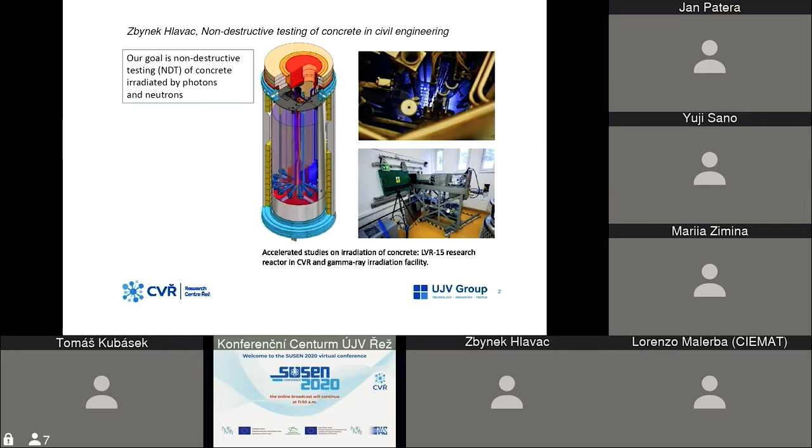What I would like to talk about in this presentation is especially non-destructive testing methods. Those methods have been developed mainly in the SUSEN project and also in our Research for SUSEN project.

We are targeted at mass change methods. Then we are trying to find the volume change — this is radiation-induced volumetric expansion. And also, what is my major focus, we are interested in mechanical properties change.

The mass change we can measure by very accurate scales. I think the accuracy is about 1/10 of a microgram, which is sufficient even for very small samples.

Volume change can be detected by various methods. We are using dimension measurement or density measurement. Density can be done by water or helium pycnometry.

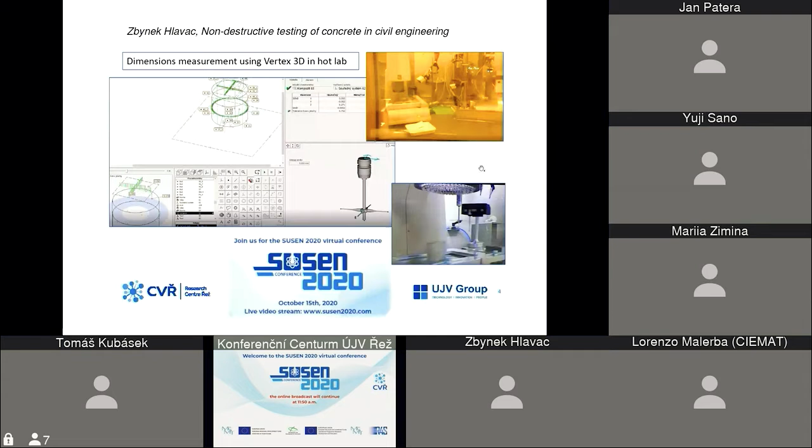Let's go on to other possibilities for how to determine volumetric expansion — pycnometry. We are using water or helium pycnometry.

Water pycnometry is a very old method, from around the 17th or 18th century, where you measure the sample in the air, then the same sample in water, and take the difference based on Archimedes' law. The difference is the weight of the water that was pushed away. If you know the density of the water or any liquid, you can calculate the volume of the sample. This is a very nice method.

The problematic thing is with any porous material, because the porosity enables the liquid to come through, and then you have to decide the time for letting the sample become saturated. It's quite tricky, so this method is rather unsuitable for porous material.

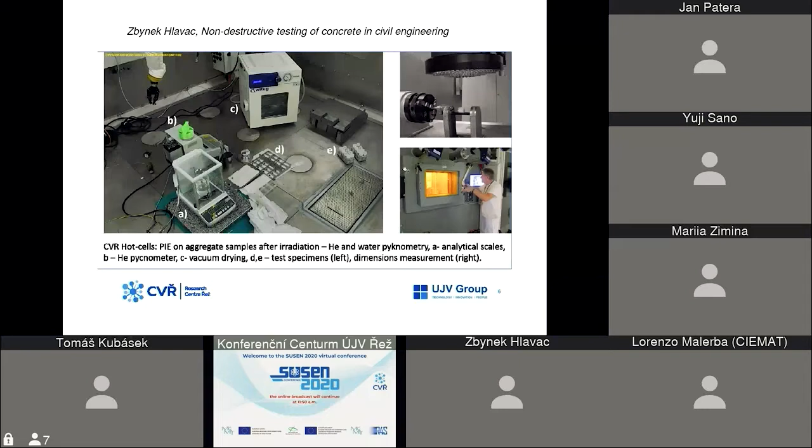What is my major, my field of interest, is the mechanical properties change due to radiation. Not only due to radiation, I can observe due to freeze-thaw circumstance, due to higher temperature, due to mechanical damage, whatever. But recently I'm testing the radiation-induced change.

What I'd like to talk about is that the radiation expansion of the aggregates makes changes, especially pressure inside the concrete, and there occur cracks that change the mechanical properties. Then we have to observe how much is the change, whether the strength, modulus of elasticity and other parameters are sufficient or not.

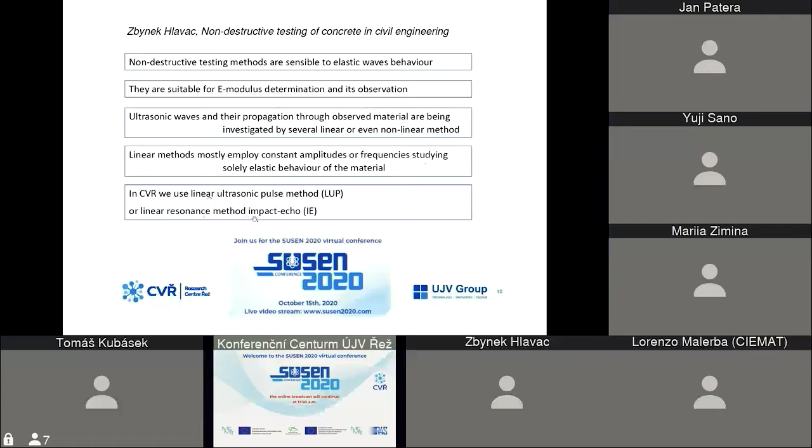Linear methods which we use and which we developed in CVR are ultrasonic pulse method and resonance method, impact echo. I'd like to introduce impact echo, which is part of the resonance method. It means you impact the tested sample and you have the answer, the echo.

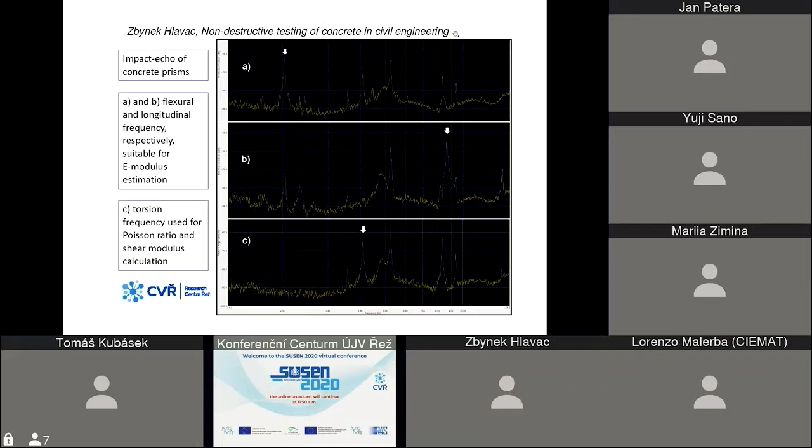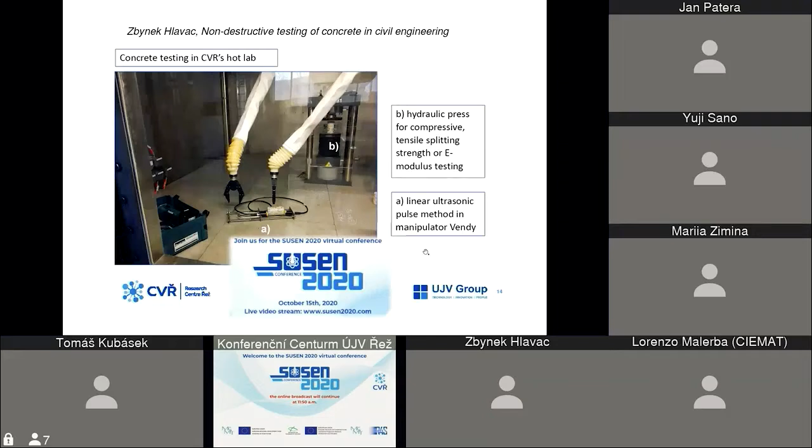Let's go on and talk about nonlinear methods. There are two methods which we developed: wave modulation spectroscopy and nonlinear resonance ultrasonic spectroscopy. When I'm talking about nonlinear methods, I'm targeting the plastic material properties, because linear methods and linear behavior go with elastic properties.

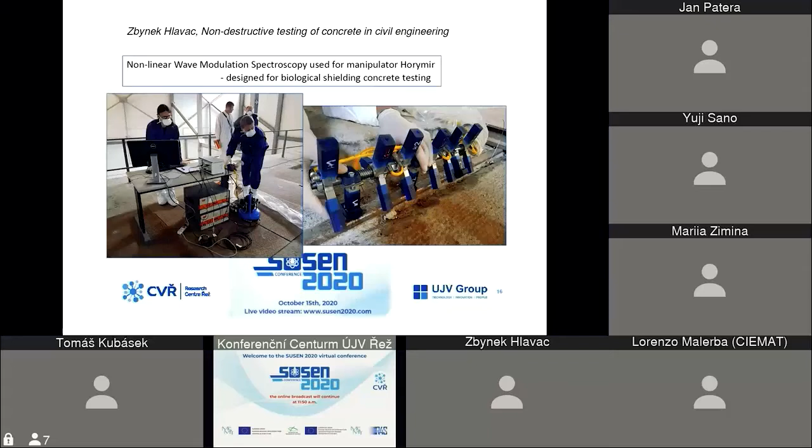This is one situation where we used our nonlinear spectroscopy manipulator, Horymir, and we are trying to test the reactor shielding. It was in Řež about 2 years ago. We developed the manipulator Horymir, which you can see on the right hand picture, and a set of instruments and amplifiers, whatever is seen on the left hand side picture.

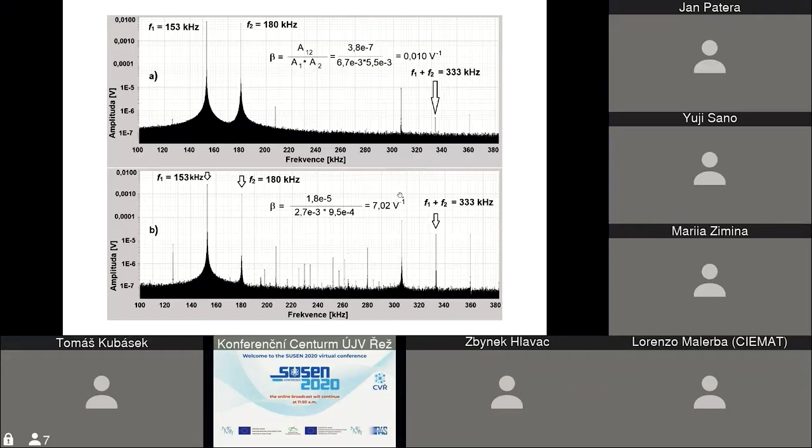But what I'd like to show is NRUS, nonlinear resonance ultrasonic spectroscopy. It works so that I'm increasing amplitude, and the frequency shifts to the left side when the sample is damaged.

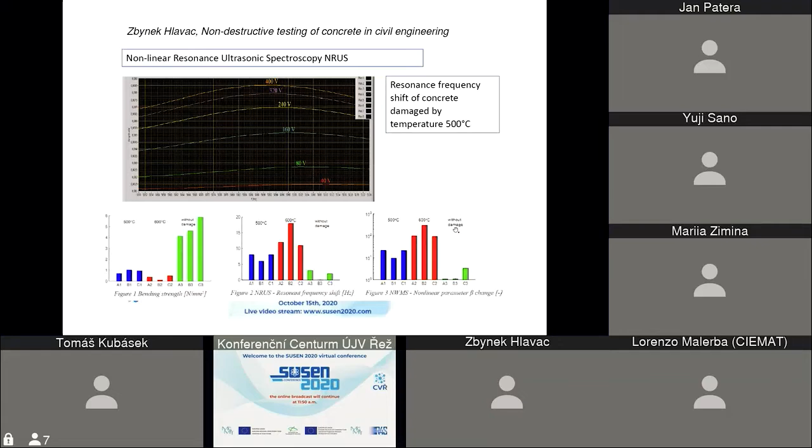The method NRUS, when I damage the samples, the parameter is very high. And nonlinear wave modulation spectroscopy parameter beta, again, when I damage the sample, the parameter is very high. I'm not sure. So let's go on.

What is our work, current and future? We started in the project SUSEN. We continued by research for SUSEN. We developed methods: NWMS, then the ultrasonic pulse method, and NRUS.

It was in 2018. From last year, we also got Betony MVČR number 2 of the Ministry of Interior project. We developed again a manipulator, and we developed that methodology. Also last year we started Horizon 2020 project URAT.

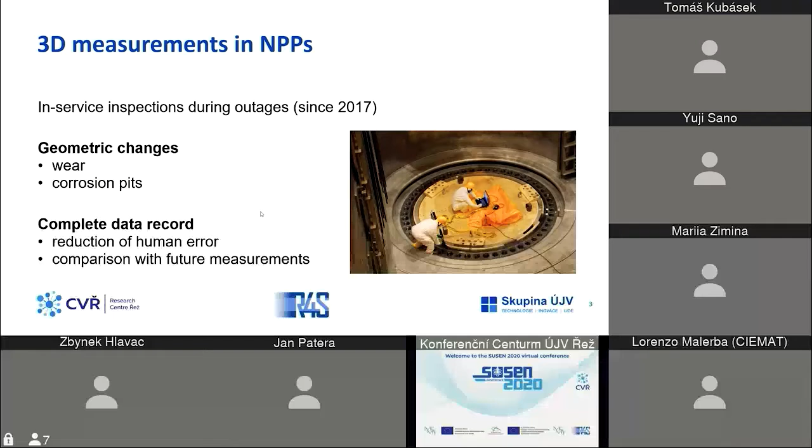Some words on measuring equipment: the most commonly used measuring device is the one you see on the right, called the Hexagon Absolute Arm with RS4 laser scanner. It consists of two parts: one is a measuring arm, and at its end there is something that looks like a pistol, which is the laser scanner. It has a quite high acquisition rate, about 700,000 points per second. Maybe the most important parameter is the standoff distance, meaning the distance we have to keep from the scanned surface, which is about 16 centimeters.

And there are other parameters, like point spacing, meaning the spacing of two points in a grid we scan, which is about 11 microns, and the accuracy of each of these points is about 28 micrometers.

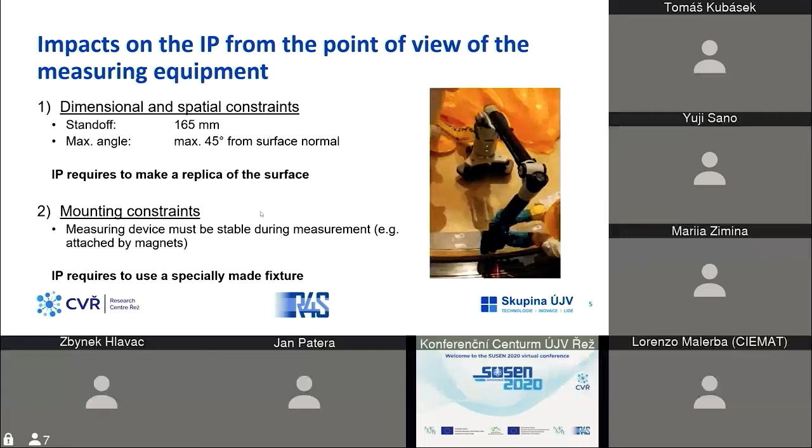Another point of view is expected imperfections, because there is some accuracy of the measuring device, but its accuracy is mostly achievable only in ideal laboratory conditions, which is not true for all cases. For example, when we scan the reactor lid, the accuracy is the same as in the lab, but mostly it is not achievable in situ.

So basically, our inspection procedure requires us to make a checking replica of the surface to verify the accuracy of real measurements. There is also some criterion for the difference between the replica and the 3D scan, but basically this replica helps us increase the accuracy of the 3D scanning.

Point of view of radiation environment: the inspection procedure requires us to reduce the possibility of surface contamination. Basically, we have to eliminate all possible cables, and the other cables we have to wrap in a yellow plastic cover.

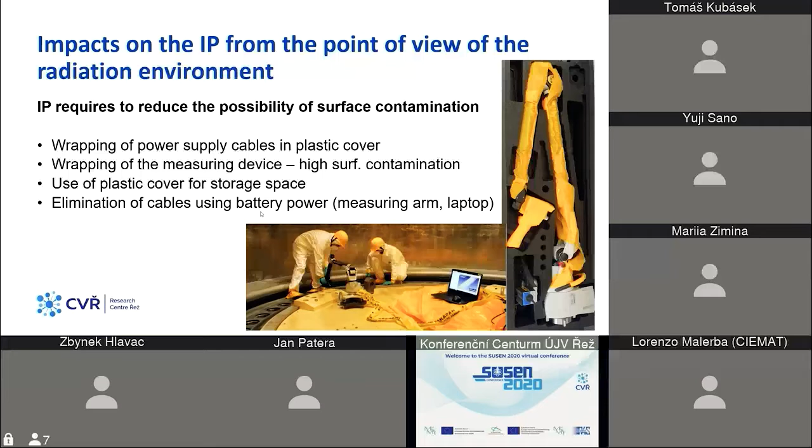There is also a requirement for shocks to be recorded, because these shocks may affect accuracy, and these shocks are recorded by a simple accelerometer. In case of shock, we have to do calibration also after each measurement.

The last part of these points of view are impacts resulting from data processing requirements. Usually these requirements are defined by our customer, but usually we assess corrosion pits greater than some value or geometric changes between outages. Some applications require us to use macros, which are powerful tools for assessment because they still assess the same way. They also allow fast data processing and allow transition from point assessment to continuous assessment.

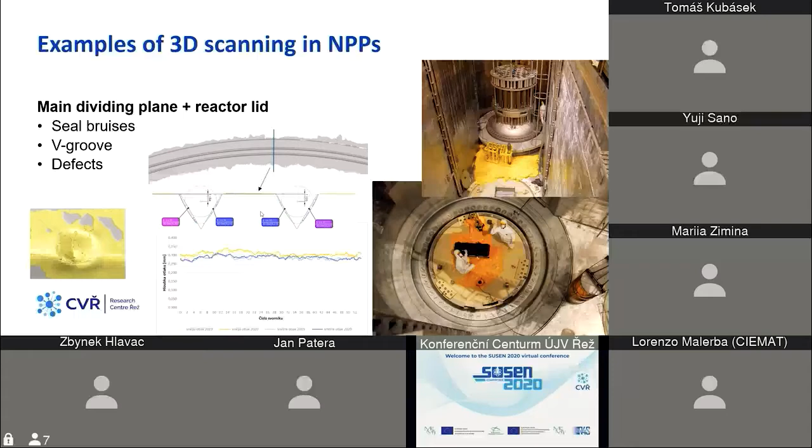Another example is the super emergency feedwater nozzle, which is located on the steam generator in Dukovany nuclear power plant. In this case, we had to scan the exact geometry for weld overlay qualification.

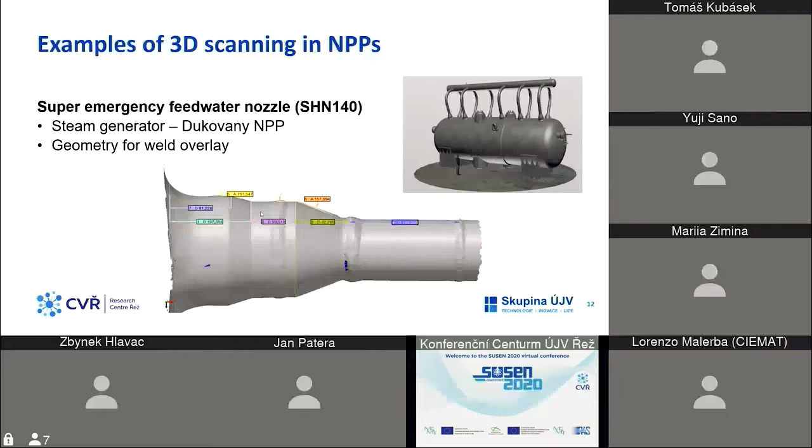In this application, we had to measure the pressurizer main safety valve seal. In fact, it was 24 newly delivered pieces where we measured roundness, coaxiality, and thickness, and everything was automatically assessed.

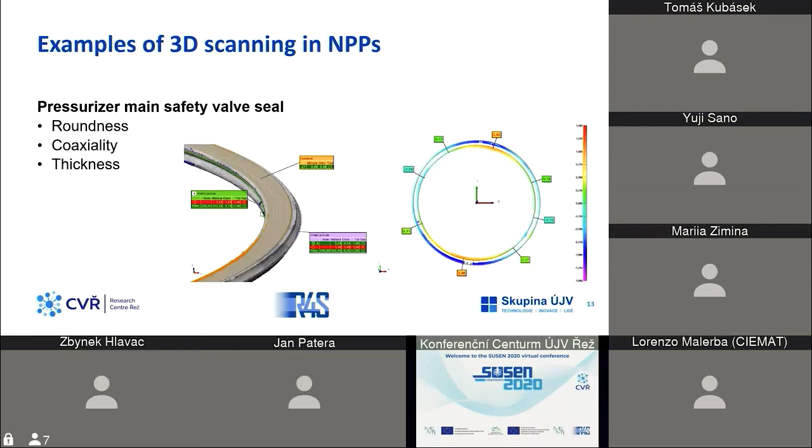A very specific application was scanning of corrosion pits in wet spent fuel storage in Řež. Because of poor access, we first made some replicas of the corrosion pits, and then we scanned them. The assessment was much more accurate from that point of view than the previous method done by microscopes.

We are approaching the end of my presentation. So I will say again that this inspection procedure for 3D measurements in nuclear power plants was developed within the Research for SUSEN project, and it has been used many times at nuclear power plants.

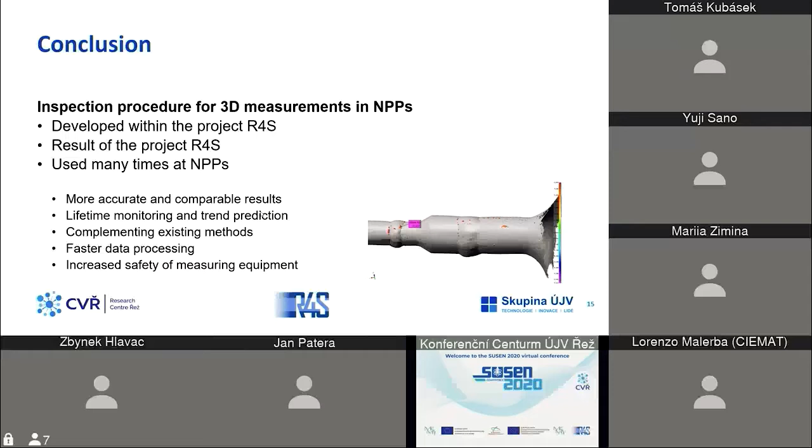Among its benefits are more accurate and comparable results, lifetime monitoring and trend prediction. This inspection procedure complements existing methods, allows for faster data processing, and increases the safety of measuring equipment. Thank you for your attention, and if you have any questions.

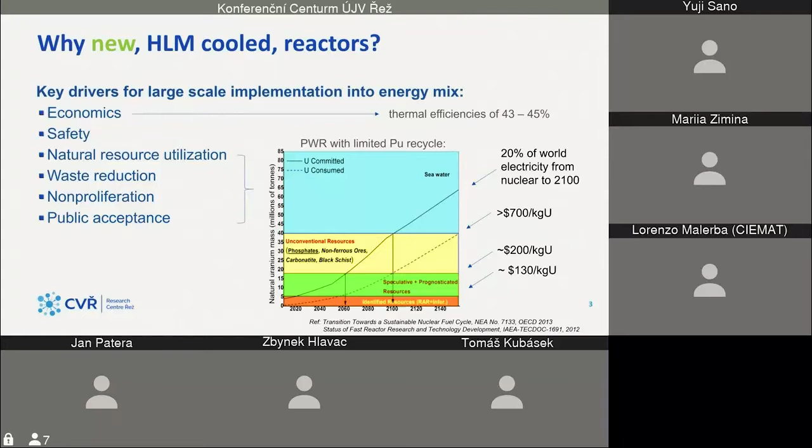Why do we want to cool them by heavy liquid metals? From my point of view, it's a perfect coolant, especially from a safety perspective, because they have a very high boiling point, so you don't need a pressure vessel. It's low reactivity in comparison with sodium. They also have benefits for reactor physics - they are poor moderators, so you can have a very hard, fast spectrum and high breeding ratios. They are self-shielding and can be recycled.

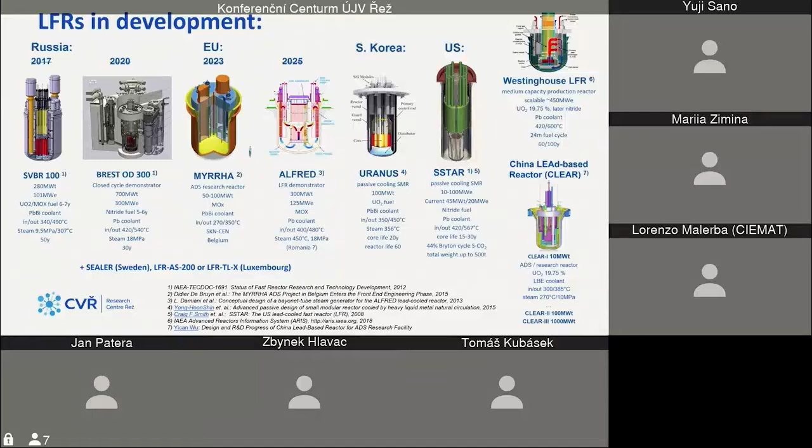So if they are perfect, why don't we have some reactors? There are lots of small or medium range reactors planned. Even companies like Westinghouse are planning to deploy reactors around 2040. So it's quite exciting technology, almost available to use, except for the material problems. So we are focused on materials.

I picked one, it's Alfred, the European reactor demonstrator. It's quite conservative because we plan to use already available materials, so temperature is limited to something like 480 degrees C, with maximum temperatures on cladding of 550 or 600 during some accident or transient state. Neutron irradiation for components should be limited to 2 dPa, and we expect up to 100 dPa. So the message here is the technology is ready, we just need some materials.

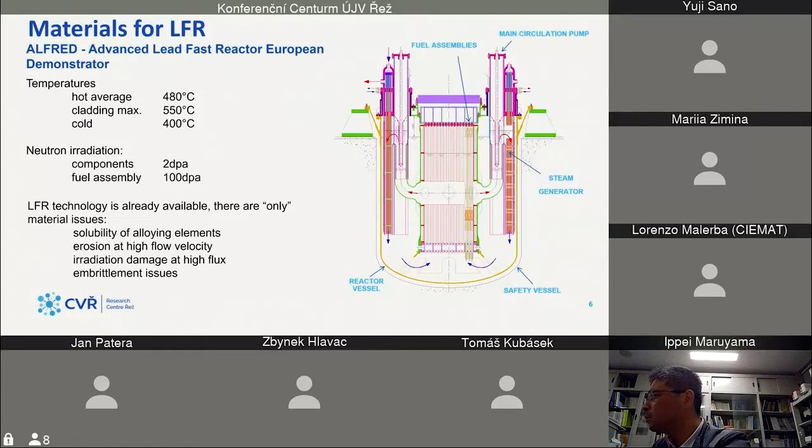Reference materials for this reactor are 316L for the vessel, primary pumps, and steam generators. It's a classical steel for nuclear energetics, well known, and lots of data is already available. But it has a problem with radiation-induced swelling and hardening.

For cladding, there is a candidate steel developed for sodium fast reactors, 15-15 titanium. It's a precipitation type of steel with good irradiation properties in comparison with the 316L.

There is also grade 91 ferritic steel. It was developed originally for fast breeders, but now it's extensively used in fossil plants. It has a unique microstructure that makes it very high temperature and creep resistant, but it's very difficult to use because it requires precise post-weld heat treatment.

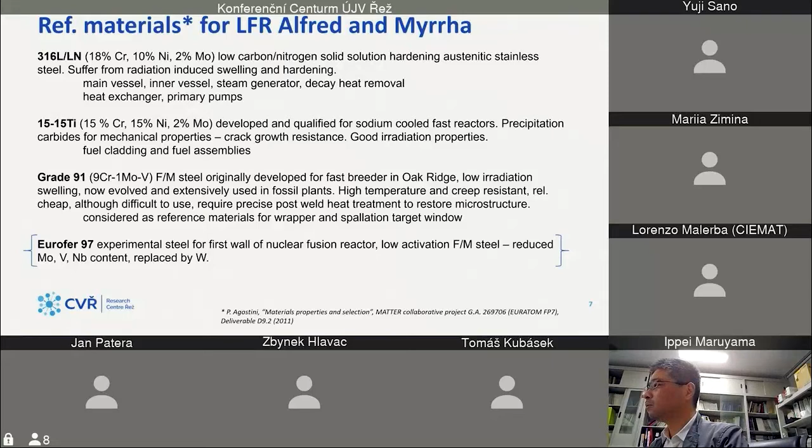And there is also Eurofer steel, that was not developed for fission reactors, but was developed for the DEMO plant for fusion, with the benefit of being low activated. So as researchers we decided to test it as well, even though it's not Alfred or MYRRHA type steel.

So, mitigation strategies for LFR. Right now oxygen control is available. It's a kind of balance between high temperature oxidation and dissolution. In the presence of oxygen, we can grow some Fe-Cr spinel that prevents nickel leaching out. This strategy works up to 480 degrees C, but at higher temperatures, dissolution takes over and we can see localized attacks.

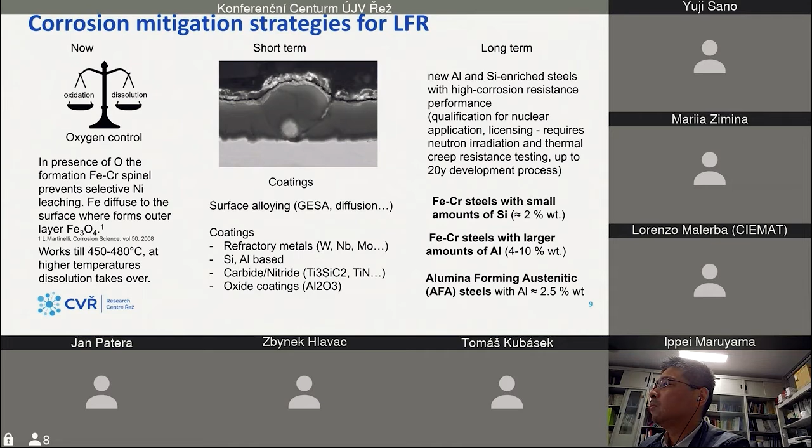Short term means that it's available right now, but not at industrial scale. This strategy is based on coatings of known materials. That has one problem, because it's hard to guarantee perfect coating over the whole surface. Even a small defect can cause localized attack that is really problematic, for example, on fuel claddings. In the long term, we can develop aluminum or silicon enriched steels that have high corrosion resistance up to 600, 700, even more degrees C, but it's a long-term process with all qualification and irradiation. It's estimated to take something like 20 years. Therefore, for Alfred, we plan this oxygen control method with possibly some coatings.

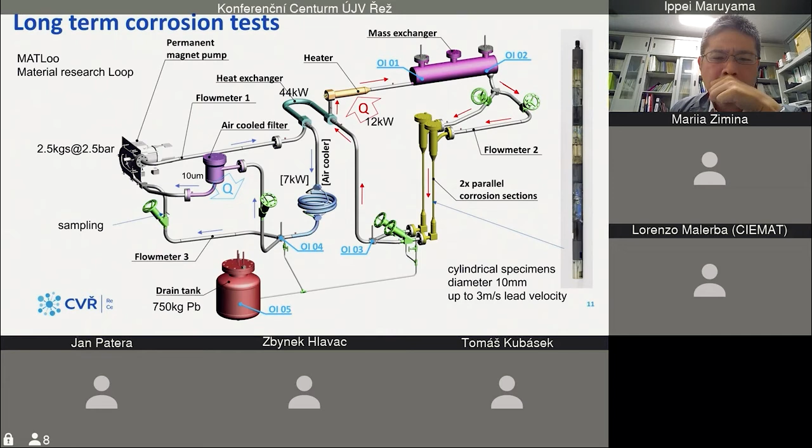For some flow tests, we built up a loop. We call it MATLoo, it's Material Research Loop. It's non-isothermal, so it has a cold leg on the left. There is a pump and filter, and on the right there are two parallel corrosion sections with narrow channels containing specimens. There are cylindrical specimens of 10 millimeters diameter, and we can reach 3 meters per second there.

So some results. These specimens were exposed for 8,000 hours in controlled lead with oxygen level 10 to -7 weight%. That's something like 400 micrograms in the loop. The difference between austenitic and ferritic steel is that austenitic steels cover themselves with an extremely thin layer that is barely visible. On the other hand, grade 91 steel grows a very thick magnetite layer that somehow protects it. This is a key difference.

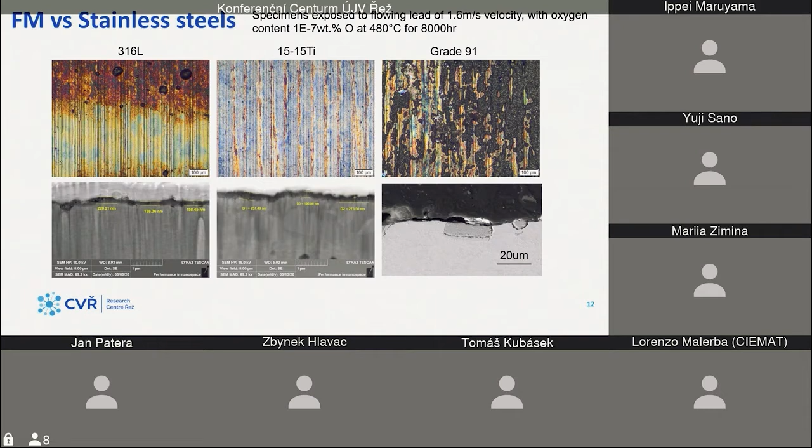Over time, the evolution is that stainless steel forms a layer a few hundred nanometers thin that after 2000 to 4000 hours starts peeling off. It's challenging for analysis because it's extremely thin. So we use X-ray diffraction, and the preliminary results show there's obviously magnetite, some chromium oxides, but also surprising is nickel. Nickel oxide is involved. It's quite interesting since the oxygen level is lower than what is needed for stable nickel oxide stability. But in this spinel, it's not a problem, so it's quite a nice result here.

There are some differences between stainless steels. For example, SS 321 showed such consistent behavior that it completely surprised us—it's behaving much better than 316L steel. Even after 8,000 hours, there is still no oxidation, and this very thin layer is stable. It's quite interesting. On the other hand, the lower content of chromium in 15-15 titanium steel

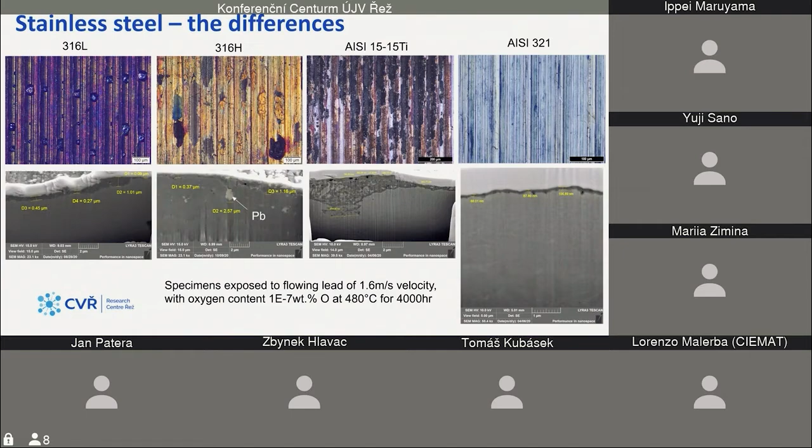leads to some magnetite growth and some localized oxidation attack. What is very important is that there is dissolution of nickel and penetration of lead. That was observed on 316H. That's the only steel that has such behavior in our test, and it's really hard to find an explanation for this behavior.

So we tried to remove some machining deformation after fine turning, using mechanical and electropolishing, to see what happens. And the result was quite interesting, because the electropolished sample was attacked on grain boundaries by lead, which is not seen on the mechanically fine-turned specimens, for example. So the surface finish is definitely something that needs more study.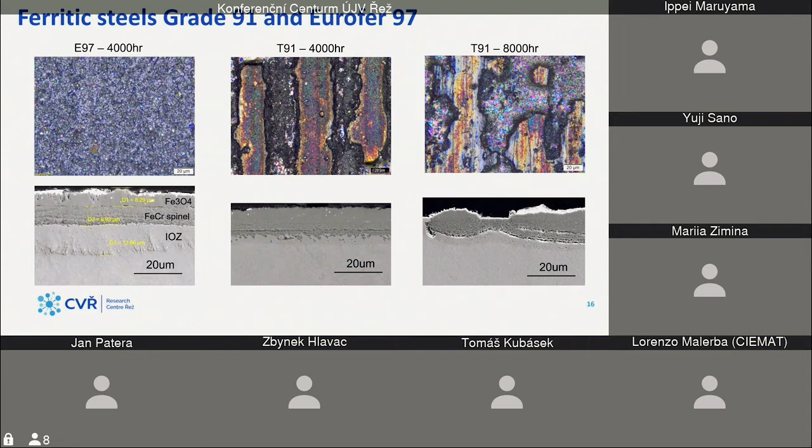So some comparison of ferritic steels here. Interestingly, in theory the ferritic steel grows spinel and magnetite on top, and usually is covered completely. In our case, because of the machining of our specimen, there are some grooves that were never covered by magnetite. It was a surprising result and really needs to be investigated more. While Eurofer is completely oxidized on the whole surface, you can see the typical features there: internal oxidation, then there is spinel and magnetite on top.

This is visible also in the distribution of oxide thickness: after 8,000 hours, Eurofer has a normal distribution, but T91, especially this 8,000 hour specimen, is 50% uncovered by oxide. So we took a closer look at this specimen, and you can see that in chemical composition there is no difference. There is a cross-section between the unattacked place and a place where magnetite developed, and the only difference is fine grain and heavily modified grain structure, but there is no difference in chemical composition.

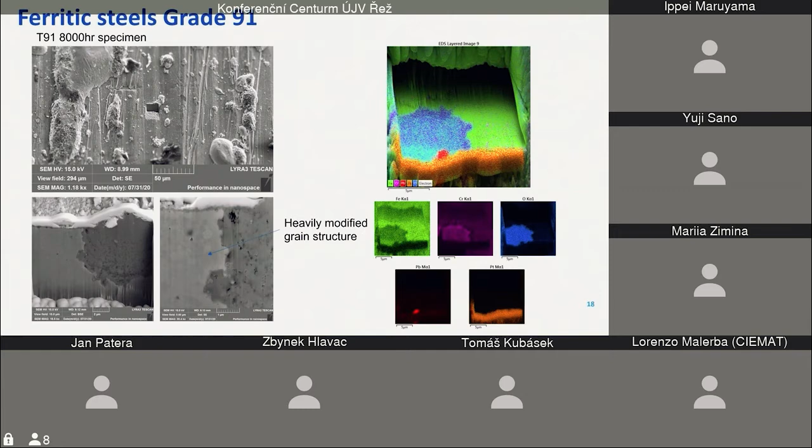So if we take a look at how fast material is lost, there are two theories for that.

Normal is a parabolic rate where you grow an oxide that increases its thickness over time, slowing the diffusion processes. If you integrate this, you get this parabolic law. But our data is impossible to fit with this type of law, so it's more like a logarithmic law.

That has some explanation for extremely thin layers in the order of nanometers that lies in quantum mechanics, but that's definitely not our case. So it's maybe a combination of parabolic law at the beginning and some peeling of the magnetite that may appear in that way, but I don't have enough points for that.

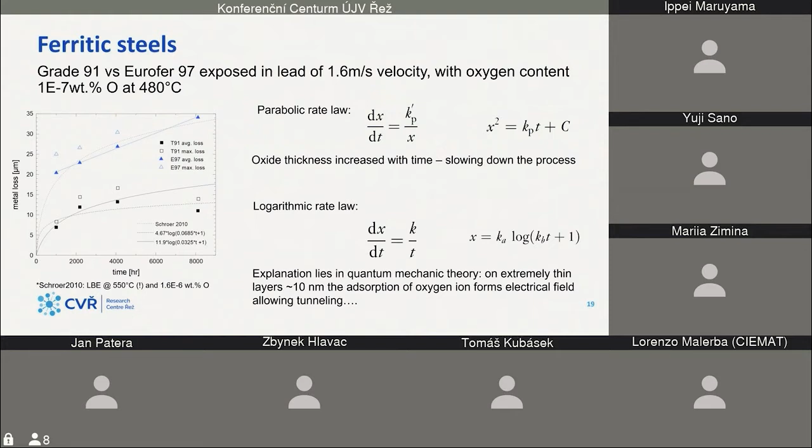So we have some open questions. Why is there not uniform behavior of T91? That's the first unknown here - the effect of surface treatment.

If we found that this fine grain caused by machining, or a modified surface layer used as surface finish, how long does it take? If it's maybe just a temporary thing for 10,000 hours, we don't know it.

Second thing is, can we use polishing as an accelerated corrosion test? Because the corrosion tests are very long and expensive, so it would be nice to have something to speed it up.

Also, the effect of higher flow is unknown at this moment, because we calculated with Sigma company that an impeller pump will operate at something like 13 to 17 meters per second relative speed between blades and the liquid lead. So the behavior of this material in this regime is completely unknown.

Also, there are some questions connected to lost material in the circuit. It's because the oxide layers are peeling off and making it impure, and the question now is what's happening there - if it affects oxygen sensor measurements, for example, it could have an impact on safety operation, or be abrasive for components, or affect how this deposition process will happen. It's not very well studied, so these are still open questions.

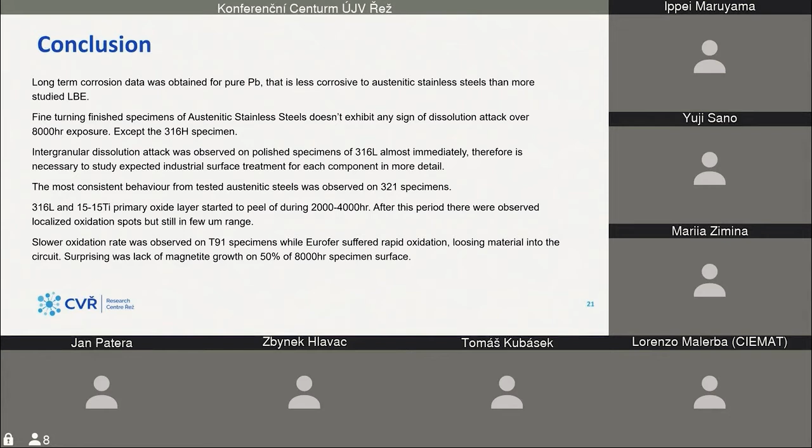Also interesting is the slow oxidation rate of T91, and why 50% of the specimen is uncovered with protection or magnetite is also very interesting. So thank you for your attention, I hope this topic interests you.

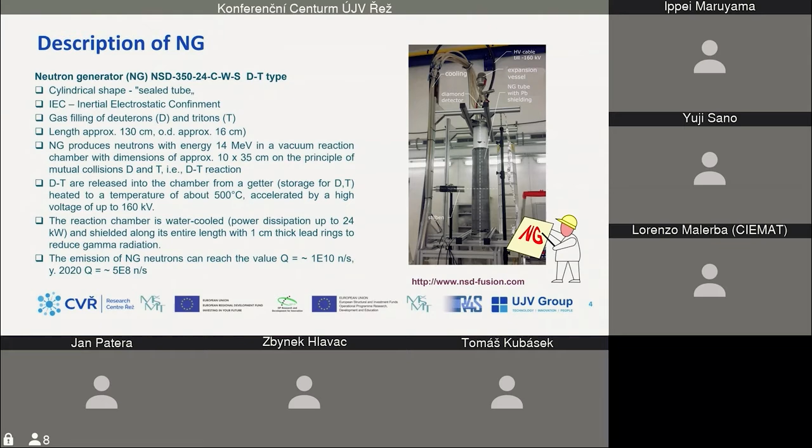Unfortunately, due to operation, we faced some technological troubles with the producer, and we had some damage in the high voltage part. After repair, we can operate it a little bit at lower power, but it is still possible to use such a generator for our experiment. There is a premise of how it operates.

In the reaction chamber, which has a cylindrical shape, we release from the getter, which is a storage of deuterium, the deuterium to the volume, and the deuterium and tritium ions are accelerated toward the cathode, which is semi-transparent. The ions are coming through the cathode and oscillate in the field. Some of them are trapped inside the cathode and create a virtual anode. The ions of deuterium and tritium are trapped inside and form a quasi-solid target. Other ions coming from the volume attack or react with the ions trapped inside, producing the 14 MeV neutrons.

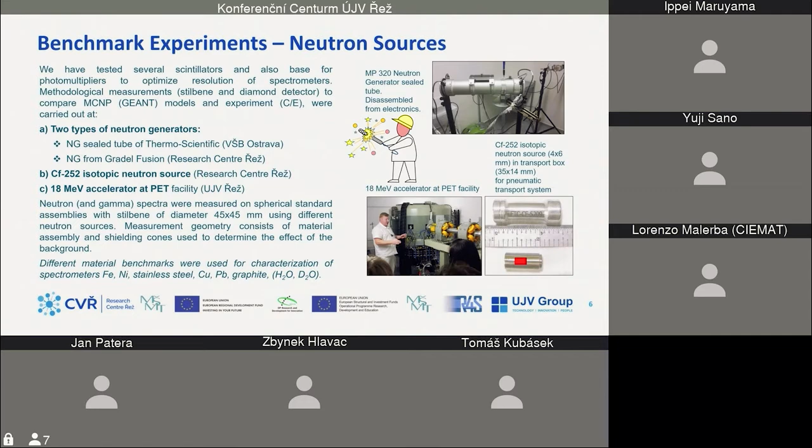This is in scale, so it's around 3 centimeters in length and 1.5 centimeter in width, diameter. There is a small amount of californium, producing 10 power 9 neutrons per second.

It is transported to the middle of some material assembly, which could be a cube, could in the ideal case be a sphere or some slab. Then we measure using the detector the leakage spectra.

Of course, the neutron generator is much bigger equipment, so we cannot put it inside any assembly. So the measurement in the case of the neutron generator also measures leakage spectra, but behind slabs of materials. The basic principle of the measurement performed in our laboratories is described in the second picture on the right side. This is the case of the sphere with diameter of pure iron with diameter 100 centimeters.

Inside there is the isotopic neutron source, and you see something like cones here. Why do we do it this way? Because for each measurement we have to perform 2 steps. One is a measurement without this shielding cone. So we measure everything, all the useful signal from the assembly, scattering of the air, floor, other sources placed in the laboratory or the walls.

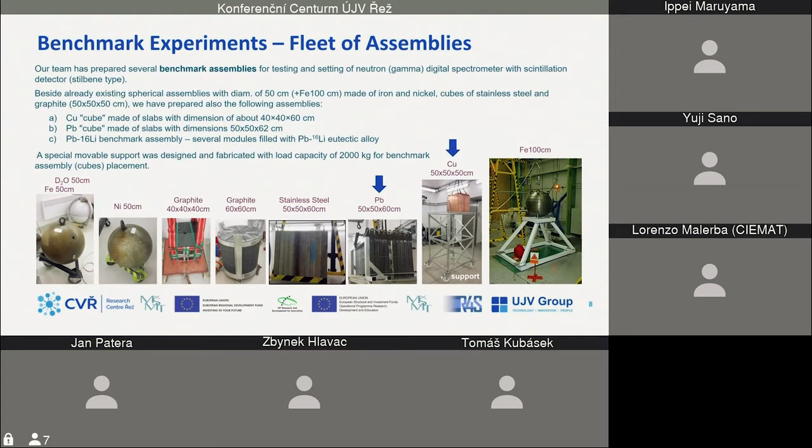The assemblies from iron, lead and cuprum are intended to be measured as part of the construction material for the fusion facility, as a first wall in the plasma chamber. So again, the experiments we perform here are focused on the comparison of calculated and experimental data.

There you see the real measurement in our laboratory with the californium source and several types of detectors, with the stilbene detector that measures in the energy range from 1 MeV or a little less, until 20 MeV. We also have a proportional counter filled by hydrogen, a spherical detector that measures from some tens of keV until 1 MeV.

You can imagine it's not an easy task because the mass or weight of such an assembly, as you see here, is about 2,000 kilograms. And materials of the support should not affect our measurement, so it is made from dural, which is almost transparent for neutrons.

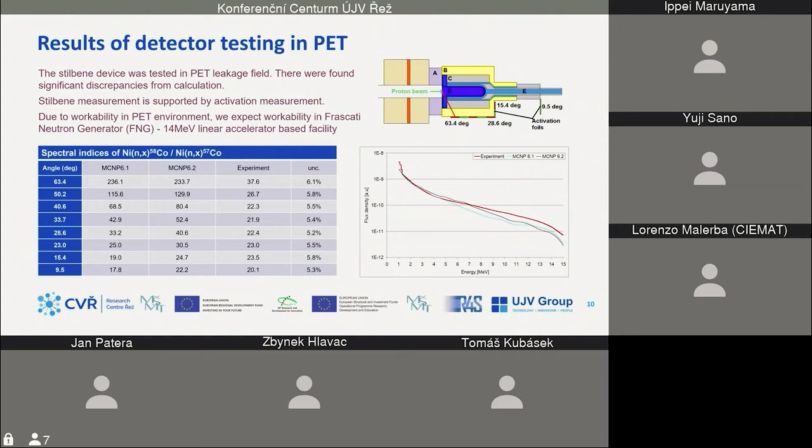Second measurement we performed in Ostrava, at the Technical University of Ostrava. The small neutron generator was located underground, about 10 meters under the earth, again with concrete shielding, and we measured the leakage spectra at different angles around the neutron generator and compared with our calculation.

In this case, we used the stilbene spectrometer, and the result, meaning the energy shift in the spectrum of the 14 MeV peak, was confirmed by measurement with the diamond detector.

So this is the second step. We have validated and tested our spectrometry equipment on different unknown sources, and verified it with a different spectrometer.

The last measurement we performed was at our neutron generator. What was interesting, unexpected even, was that the peak of the 14 MeV was doubled. At first we thought the reason was problems with resonance, reflection, cables, or electronics, but after getting confirmation from the diamond detector, we found that the peak is doubled due to the geometry and the way of the reaction inside the neutron generator.

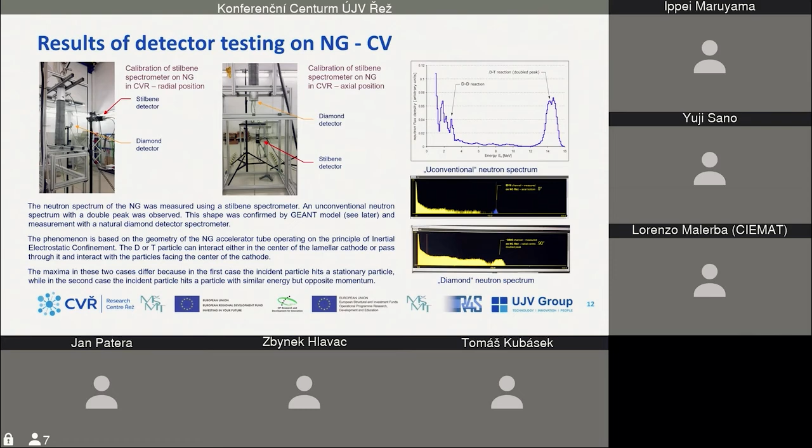We can then describe what is caused by the material, and we can measure the leakage spectra, described by some model or program. In the case of our generator, it was very complicated, as each producer covers his copyrights and doesn't provide us with completely perfect data for description.

So during modeling of the neutron generator, to prepare a computation or model for the calculation as close as possible to reality, it is impossible, due to business or industrial secrets, to model in detail. So we have to simplify the model of the generator again, and for the calculation we use the GEANT code, because the MCNP code is impossible to use for modeling behavior in the gas or the mixture of deuterium and tritium.

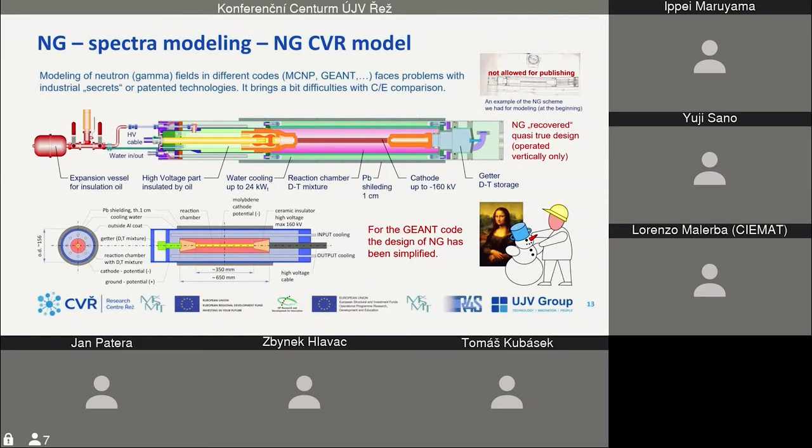As you see, it's very difficult to make a model close to reality. What is the time? Yeah, 32 minutes. Okay, this is the last 3 slides.

Two days ago, we prepared an experiment with more activation foils. It's based on gamma evaluation of activated Teflon foils, the reaction on fluorine, later producing the annihilation peak, with the flat area around the peak proportional to the energy or flux intensity. Since this morning we have the first results. Interestingly, the middle part of the 35 cm long reaction chamber behaves almost like a beam, which is perfect because we will not get much scattering from the wall and floor.

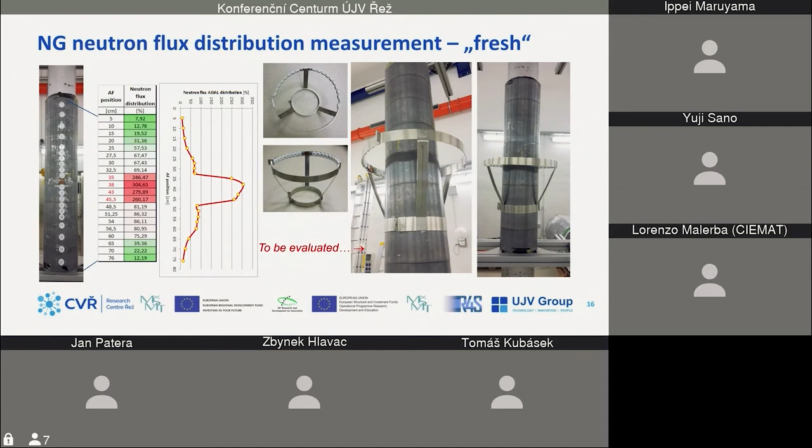There is another experiment prepared for next week, so we will continue with mapping. After that, we will be ready for measurement of real assemblies for the project where we participate and play an important role with our neutron generator.

We collaborate with the Eurofusion Consortium and with our group on the water-cooled lithium lead of our company. There we are responsible for the neutronics benchmark experiment.

Although we were invited to measure at the Frascati neutron generator in Italy, unfortunately due to COVID we had a one year delay, so this measurement will be prepared for next year.

Some references you can see later, and there is an acknowledgement for support in the frame of the project. My thanks for your attention. Thank you very much.

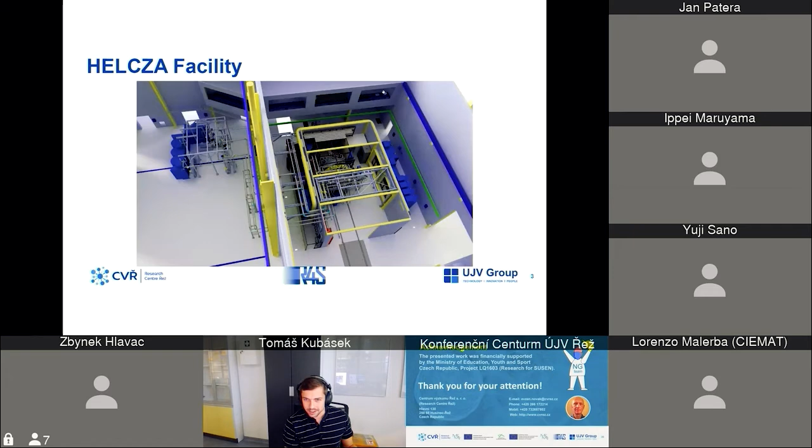This is the current layout, our floor plan. Like I said, in the past year there's been some major improvements, so all these colored rectangles are new stainless steel rooms that have been built due to the nature of the testing that we are going to conduct, mainly for health and safety reasons. I will tell you why in a moment as well. I will describe this picture later in the presentation.

Here you can see HELCZA in her full glory. It is basically a stainless steel vacuum vessel equipped with an electron beam gun. The vessel is 2.5 meters in diameter and 2.5 meters lengthwise, to give you an idea of the size. Here we have 2 mechanical pumps for reaching medium vacuum and 2 cryo pumps on either side to reach a high vacuum of up to 10 to the power of -4 pascals.

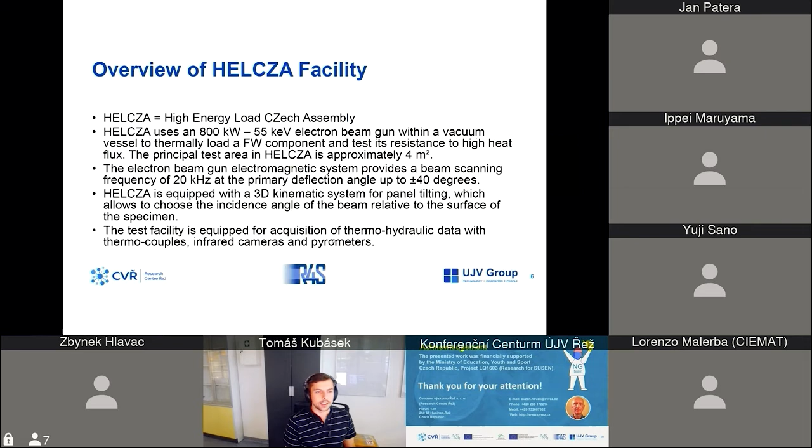Here you have some specifications. I forgot to mention that the lid is equipped with a kinematic system which can rotate and tilt the sample as we like, because the first wall components are not all flat surfaces, they have some angles, so we need to be able to test different angles. An important part is the cooling system, because the sample will get very hot, so we need a proper cooling system. We are using demineralized water, which we create here at the facility ourselves.

Our facility can provide temperatures from room temperature up to 320 degrees Celsius, a pressure of 15 megapascals or 150 atmospheres, and a flow rate of 40 cubic meters per hour through the sample.

Here are some specifications of the electron beam gun. What I didn't mention is why we can reach a high vacuum of 10 to the -4 pascals.

Our operating pressure is actually higher. We reach it by introducing nitrogen gas. We use nitrogen because it is relatively inert, easy to obtain, and not as easy to ionize as, let's say, argon or other noble gases. So there is less danger of sputtering the cathode of the electron beam gun.

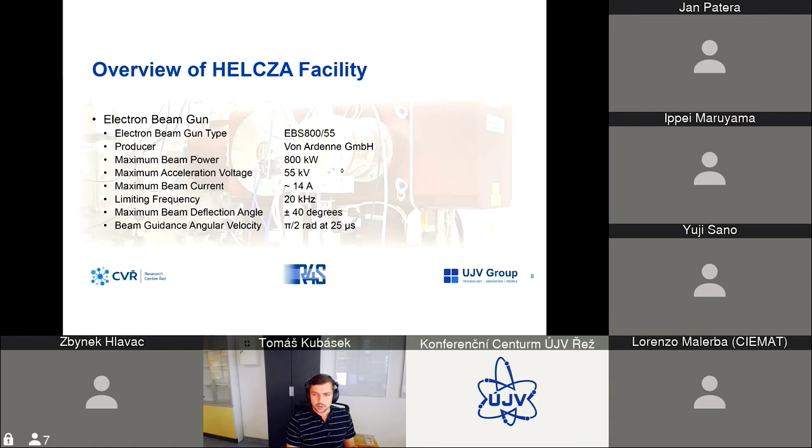HELCZA was primarily built to test plasma-facing components. At the moment, we have 2 major contracts. The first one is Fusion for Energy, which is the European branch of ITER, International Thermonuclear Experimental Reactor. For them, we will be testing primarily the first wall panels.

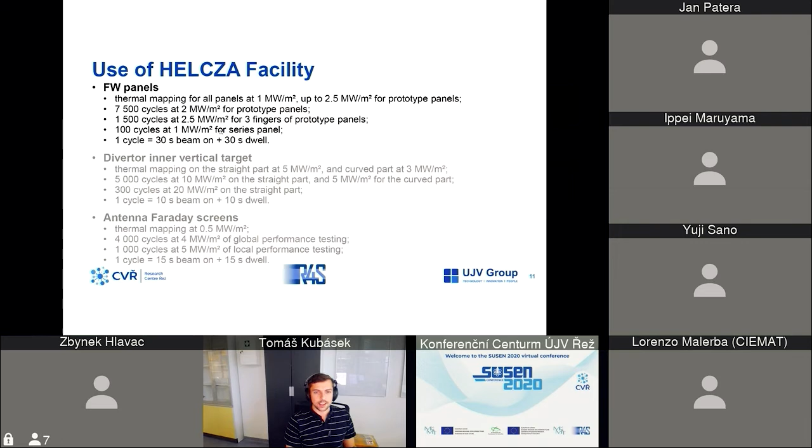Here are examples of the first wall panels from 3 different manufacturers: Atmostat, Framatome, and a consortium of Iberdrola and Wood. I should mention that the surface of these panels is made from beryllium, which is the reason why HELCZA has undergone some expansions in the past year, which I will talk about at the end of the presentation.

I should also mention that we are currently in possession of a panel from Framatome. I apologize, I don't have a picture because we are not allowed to open it yet, so you would just see a closed box anyways.

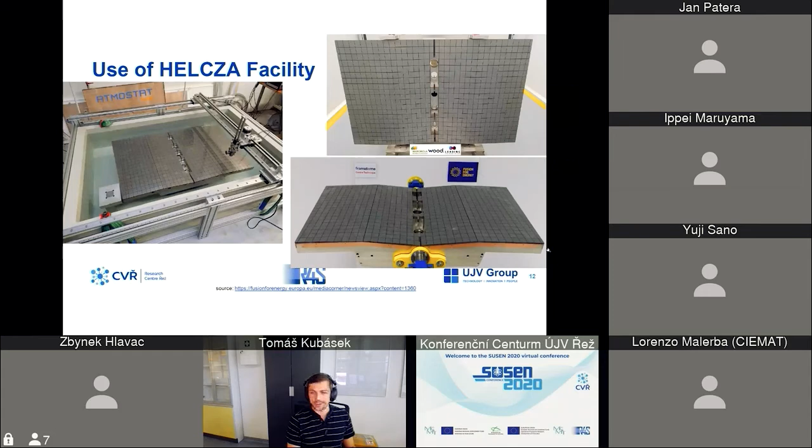In the past few years, HELCZA has undergone a commissioning process. Firstly, for Eurofusion, we were testing diverter mockups. On the picture on the right, you can see a copper mockup of a diverter. This is not the real diverter, which will be made from tungsten or wolfram, shown on the picture on the left here.

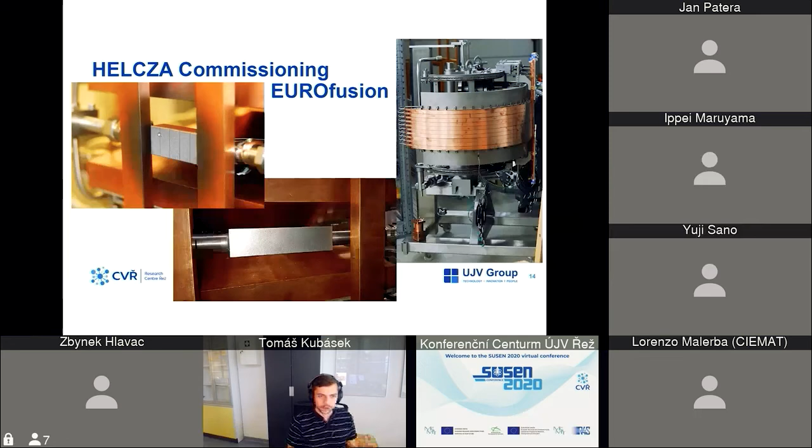Here's a small piece of tungsten from which the diverter will be made, and here is a piece of molybdenum, which was tested in the same way as the tungsten. The tungsten was positioned in this mock-up holder, and it has two copper plates behind it to catch any electrons that miss the target, because it's a very small target and it's hard to exactly hit it. So in order not to make a hole in our vessel, we have this kind of beam dump, we call it. All of this is cooled with demineralized water.

This year, we have undergone the commissioning part for the Fusion for Energy contract. Part of this commissioning test was proving the stability of the inlet parameters of the cooling water. We had to prove that we can change all the parameters independent of each other, and they will remain within a defined margin: 10% for temperature and 5% for flow and pressure from a set value.

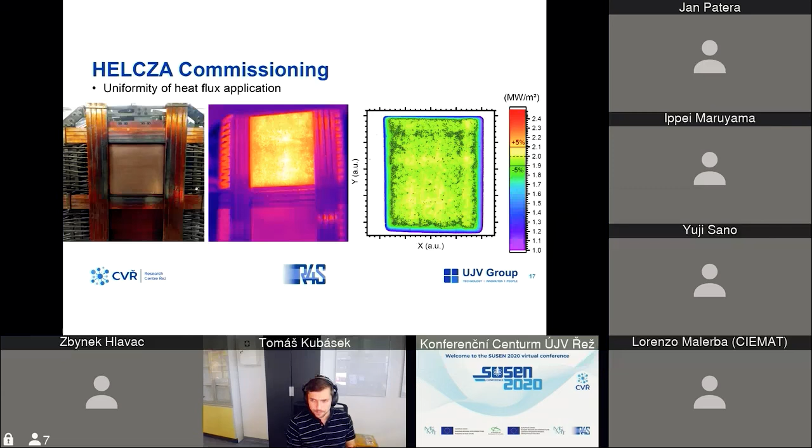Here we used the X-ray Bremsstrahlung that is created by radiation by electron beam. This is a pattern of the electron beam path. It follows this path and creates this X-ray image, which, if we take a profile, you can see it is not very homogeneous. So we have to modify the pattern to allow for a different angle of incidence and different position of the window to achieve a nice homogeneous radiation all around the area.

Another part of the commissioning test was a cyclic test. We had to prove that the system can withstand long-term cycling, as well as the cooling water parameters.

Here you can see the absorbed power into the target and into the shielding frames. I should say that this is not exactly the power absorbed by the target or the shielding frames, but it is the power absorbed by the cooling water. So it will be slightly lower than the actual power absorbed by the target because of some heat losses, like from radiation or maybe from conduction to other parts of the assembly.

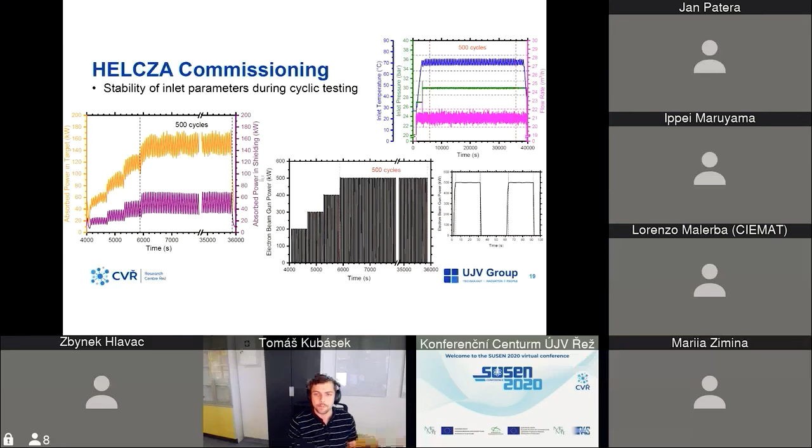We were trying to reach the high heat flux of 2 megawatts per square meter, which we calculated by taking the average target absorbed power over one cycle, which is 60 seconds, and this value should be half the power input in the first half of the cycle when the beam is actually radiating the target. So if you multiply this value by 2 and then divide it by the size of the window, we should get 2 megawatts per square meter, which we almost got here.

So, like I mentioned, in the past year, there has been some expansions, mainly due to health and safety, because the first wall panel surface is made from beryllium, and many of you may know that beryllium is very toxic when inhaled in a dust or fume form.

So we had to create a series of interconnected boxes that each have their own defined under pressure, so that when a door is opened from one box to another, the airflow tends to go towards the most contaminated area, which is right here, immediate to HELCZA.

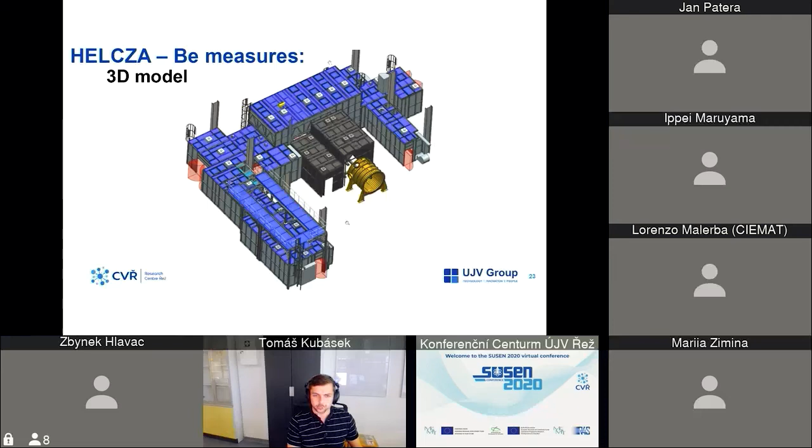So, like I said, the main reason for implementation of this system was health and safety of personnel working in the possibly contaminated area.

During the past years, when we were conducting tests with the copper target, we found that it produces a lot of dust, which even the HEPA filters were unable to completely catch. So it was clear that we had to make some adjustments.

And also, maybe more importantly, there was a new European Union directive in the year 2019, which defined how much beryllium a worker can be exposed to in a given time.

Lastly, I would like to mention the first wall panel manipulator, which was designed by our coworker, Lukáš Kotíšek.

This manipulator will allow the moving of the first wall panel into the rooms adjacent to HELCZA, and then this top part will disconnect and slide the panel on a ramp, on a manipulating ramp, which is positioned here, connect the panel to the cooling system, and then go out the same way.

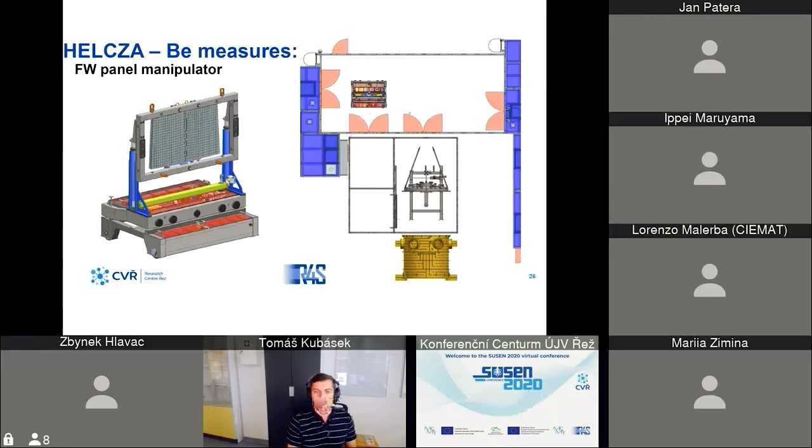And lastly, due to the building contamination, we have to implement personal protective equipment for the highly contaminated area, which is, if I scroll back, the red and the pink one, the closest one to HELCZA.

The personnel will have to wear more protective equipment, such as this overpressure suit connected to the external air. And in the other rooms, the workers will have to wear these hoods with personal respirators and personal air samplers, which will monitor any potential air contamination that they've come in contact with.

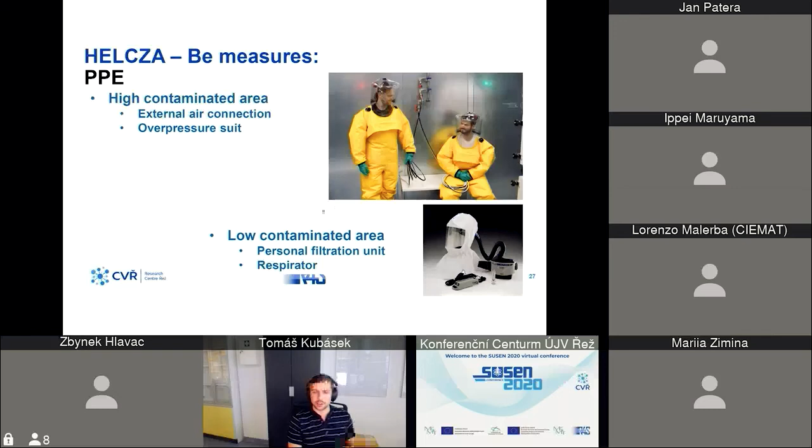So thank you for your attention and for your patience. I'm sorry I was a little long, but if there are any questions.

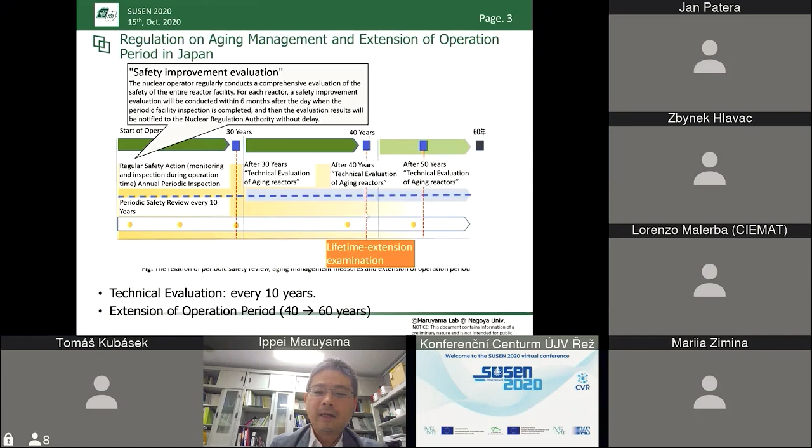Based on this background, the concrete structure is a concern because concrete is very difficult to replace. Once the concrete is degraded, it is very difficult to extend the life of the nuclear power plant. So there are several issues raised to study or to do research with regard to the concrete member.

One of the fields, the irradiation environment, is the highest concern in Japan. We have two kinds of nuclear reactors: one is a boiling water reactor, and the other is a pressurized water reactor. In these reactors, there's a concrete member which supports the reactor vessel or shields the neutron and gamma ray from the reactors.

This concrete is affected by neutrons and gamma rays for a long period. The expected fast neutron fluence is more than 10 to the 19 neutrons per square centimeter for 40 years.

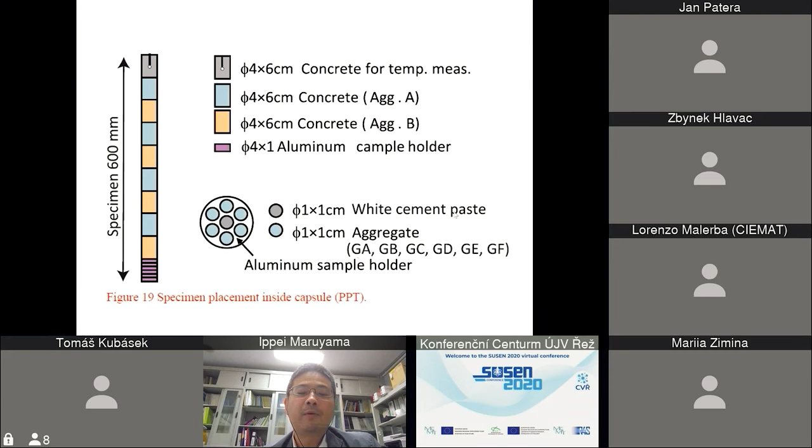At that time, we used a reactor which has already been shut down. This reactor is a heavy water reactor, which means the gamma ray impact on the concrete is much reduced, and the temperature range during irradiation is realistic. For that purpose, we decided to use this one.

After the irradiation, we found that the surface of the concrete shows a large amount of cracks.

For example, when we do the tensile experiment of concrete, only 200 microstrain is enough for getting the tensile strength, but the concrete itself was expanded due to some reason.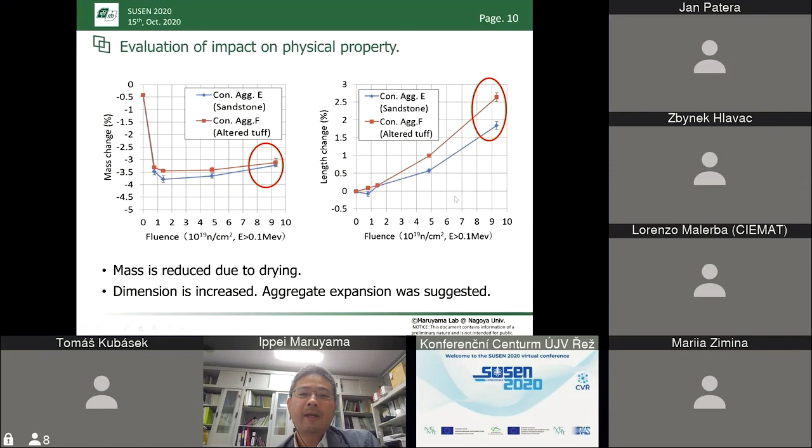In addition to that, we do the loading experiment, and we confirm the reduction of the concrete strength, and also the Young's modulus reduced dramatically.

We prepared two different concretes containing two different kinds of coarse aggregate: one with a high amount of quartz, and the other a general sandstone. When we used the large amount of quartz in the coarse aggregate, it expanded much more and showed a large reduction of compressive strength. The sandstone aggregate showed a relatively mild reduction, but still we see reduction of the concrete strength and Young's modulus.

So we have to identify the mechanism of this degradation. We did the irradiation experiment on aggregate samples and performed some PIEs.

This is the result of XRD on one of the irradiated aggregates. We show four different levels of neutron fluence, and at very small neutron fluence, we clearly see the peaks of alpha quartz and also albite inside the aggregates. These are the major rock-forming minerals of the aggregate.

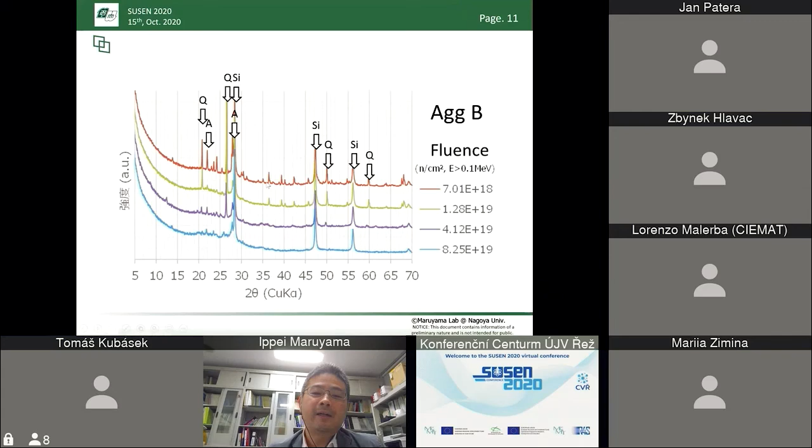Some of the aggregates don't follow the linear relationship, probably due to the contribution of other rock-forming minerals such as albite. Therefore, we found that in the case of sedimentary rock, alpha quartz is very crucial for the expansion of aggregate, which causes expansion of the aggregate and degradation of the concrete.

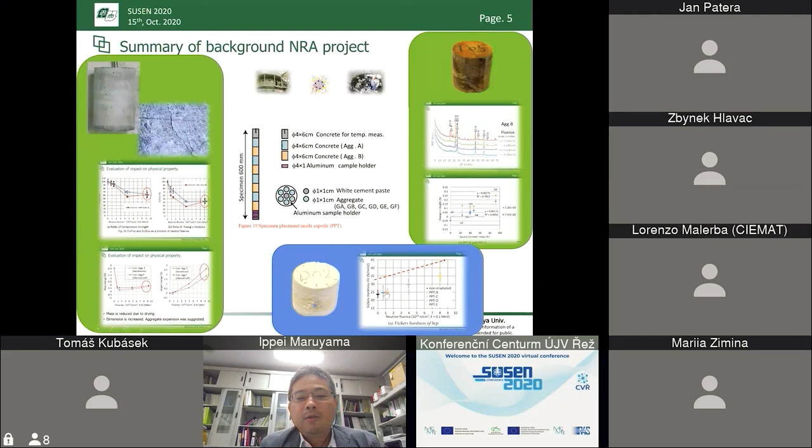When we think about concrete, the binder is the cement paste, which is a mixture of Portland cement and water. When we do the irradiation, we confirm the strength change by using the Vickers hardness evaluation. This is the relationship between Vickers hardness and neutron fluence.

As you see, we see an increase in the strength of the hardened cement paste after irradiation. This means that the cement paste is very durable and tolerant to neutron irradiation.

This can be explained by the probability that neutrons create some defects in the cement hydrates. But at the same time, due to the high amount of water and high surface area, we see water content inside the specimen. Probably after getting the defects, the hydrates dissolve and precipitate again, and the defects get filled through this dissolution-precipitation process. Therefore, the cement paste is quite durable, while the aggregate is very sensitive to neutron irradiation.

Oh, all right. Excuse me.

So, the summary of the Nuclear Regulation Authority project: we found that concrete is sensitive to the neutron irradiation process, and the compressive strength and Young's modulus are reduced. The linear expansion versus compressive strength ratio showed good agreement with previous data, which I didn't show today, but which corresponds to the degradation of concrete under free deformation, not restrained conditions.

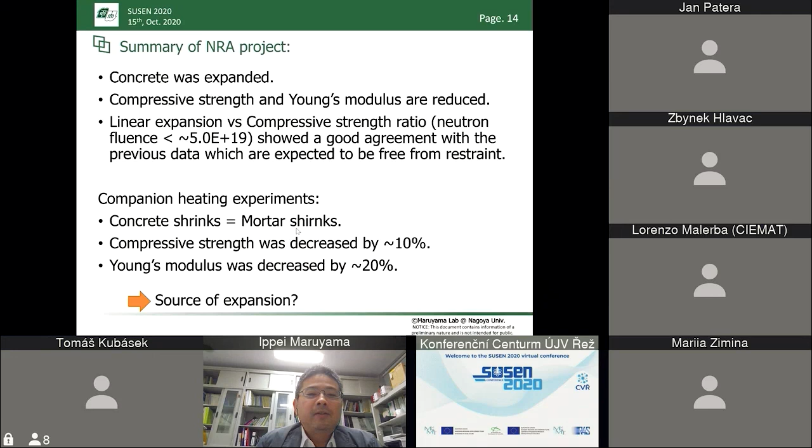We found that the aggregate can expand, especially certain types which are very sensitive, while the hardened cement paste is very durable against neutron irradiation. So the source of concrete degradation is the rock-forming mineral affected by the neutron, which causes amorphization and shows a reduction in density.

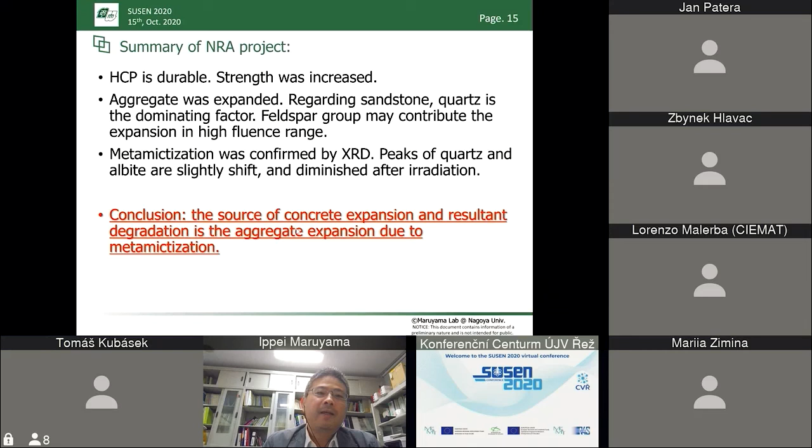After this project, the NRA published a technical report mentioning that 10^19 neutrons per square centimeter is the threshold for showing reduction of the physical properties of concrete. Therefore, the utility has to defend and show that the concrete soundness is maintained above 10^19 neutrons per square centimeter of neutron fluence.

Therefore, a new Japanese project was launched by Japanese METI. The objective of the new project can be summarized in three terms: one is expansion data of all the aggregates covering Japanese nuclear power plants, the second is safety evaluation methods and their scientific background for concrete members affected by neutrons, and the third is the flux impact.

As you know, accelerated experiments sometimes give data that differs from realistic conditions, but unfortunately we don't have any data about realistic conditions from anywhere. Samples harvested from a decommissioning plant would be very helpful, but unfortunately we cannot get any concrete from the decommissioning process. So we have to think about the flux impact theoretically.

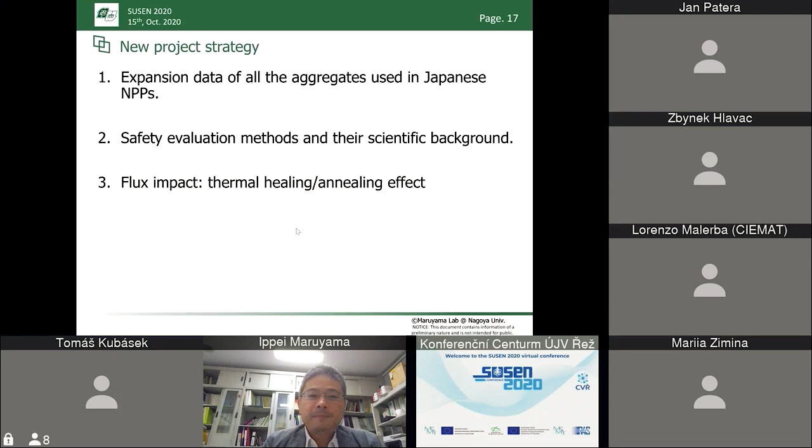When thinking about the expected soundness evaluation procedure: first, we can use neutron fluence—if we set a certain reference value, below that we can say it's safe. Once that is violated, we can evaluate the soundness of concrete using the concrete strength of the biological shielding wall or RPV pedestal structure. And even if the concrete strength in some part of the member doesn't satisfy the required design strength, we can still evaluate the structural performance. But for all three of these, we don't have enough data.

As I mentioned, limestone has an ionic bond and is very tolerant to neutron irradiation, showing no expansion in the range of realistic neutron fluence for light water reactors. Therefore, this kind of reference level is a function of the rock-forming minerals or the rock itself, so we have to do some additional experiments.

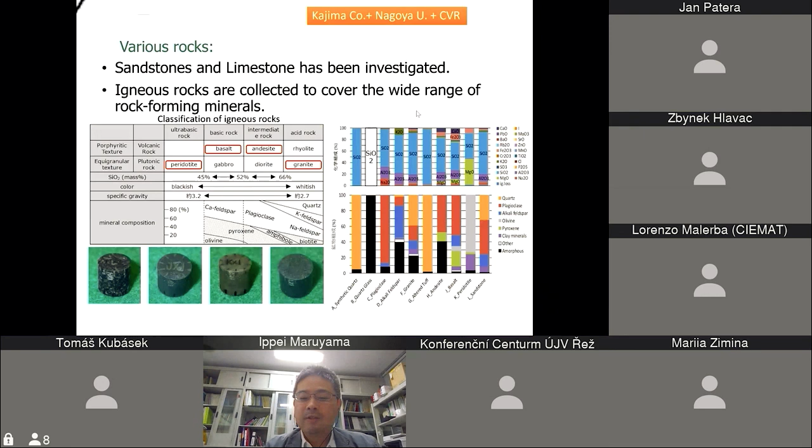Now we are irradiating these samples using the LVR-15 nuclear reactor. As recommended, we put the samples in this hole—this is the irradiation rig, and we put 33 samples in each. The 33 aggregate samples are encapsulated inside each tube, and we put 4 tubes in one rig. This is a very smart way of doing the irradiation.

After getting the data, we try to analyze which kind of rock formation is very tolerant to neutron irradiation, and what contributes to the expansion of the aggregate. We will try to analyze this.

And for the second, now we are doing the irradiation. Currently, the situation is something like this. We are still in a 1 year irradiation period, and then we will do the PIEs. So the results will come after 2 years probably.

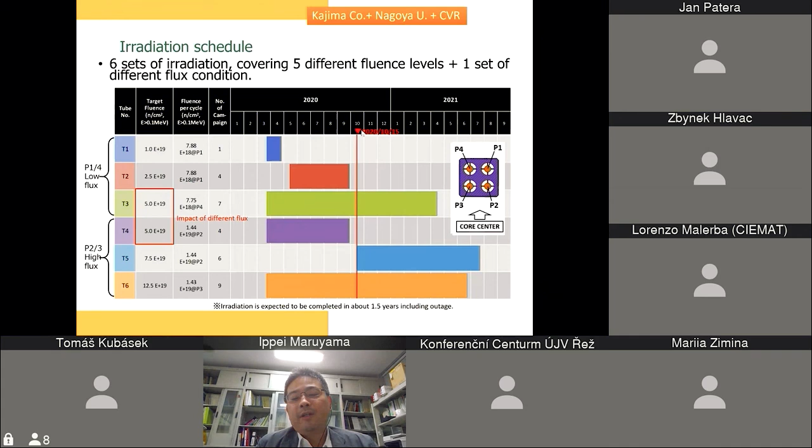With regard to the safety evaluation, we are developing new numerical methods. We call it RBSM, rigid body spring networks, where we model the aggregate and mortar and give each constitutive law, trying to reproduce the mechanical behavior of the concrete, and we can evaluate the concrete property change after neutron irradiation.

We also try to expand this process for evaluation of the biological shielding wall and the bond behavior between the concrete and the reinforcing bars, and try to simulate the seismic motion of the cylindrical reinforced concrete member. Based on this background, we will build the constitutive law for the FEM, and expand this result to the realistic scale analysis.

Finally, we are doing the theoretical consideration of the metamictization of the rock-forming minerals. One of my colleagues is doing molecular dynamics to evaluate how many voids are created in rock-forming minerals, and the other colleague is doing ion irradiation bombardment experiments with different kinds of ions, analyzing the energy deposition through radiolysis and bombardment, and how this energy contributes to the expansion of aggregate.

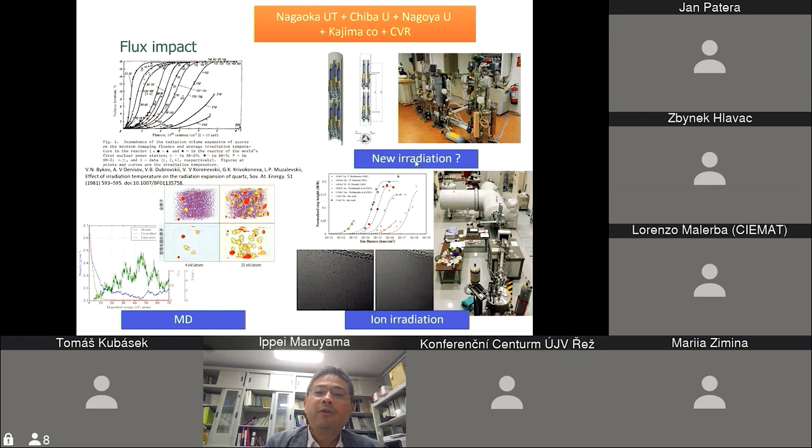So this is the overall project framework. The highest level is the CNWG relationship between the United States and Japan. Under the umbrella of this relationship, METI funded this research to the Mitsubishi Research Institute, who manage it. Nagaoka University of Technology, Chiba University, Kajima Corporation, and MRI Research Associates contribute to the experimental work and numerical research.

CVR also kindly does the radiation experiment for this project. So all these members are currently doing the research.

Many nuclear power plants are waiting for the results of this project. As you see, some reactors start extension of lifetime or extension of operation period from 2024. So before that, we have to publish the results of this project. There is a deadline, so we are all elaborating the research toward this deadline.

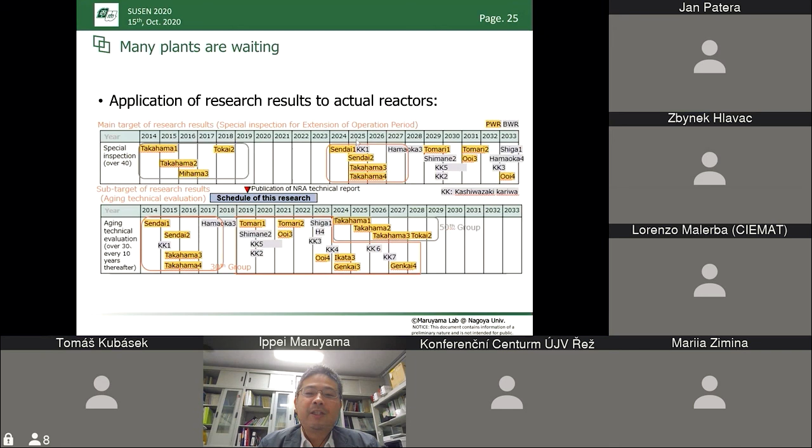That is the brief explanation of our project. Thank you for your attention.